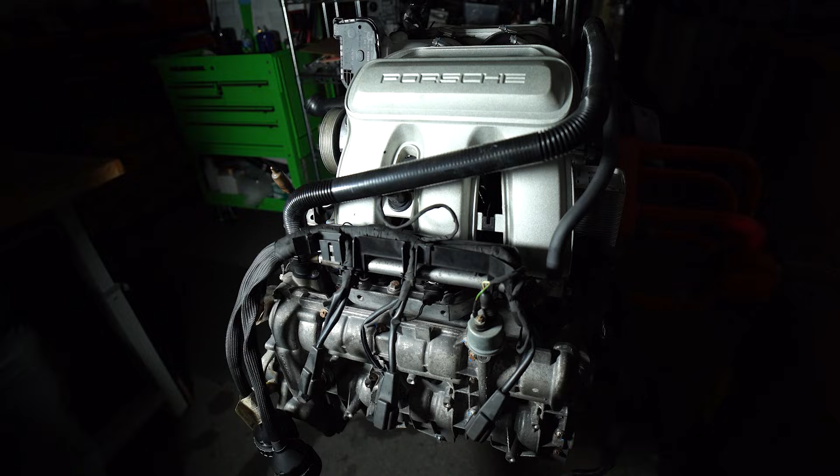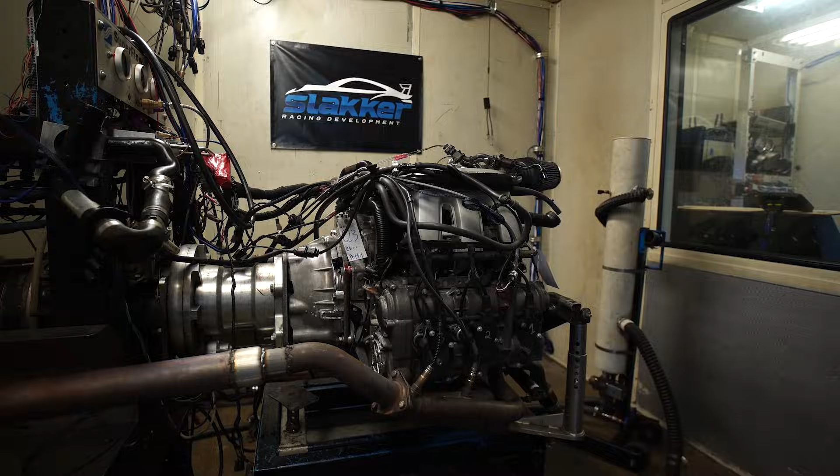What do we got today, Philip? Well, we have a little Slakker 4.1 powered by a Hartech closed-deck system with upgraded camshafts, stage 2 port job, our GT3 throttle body and plenum upgrade, and then our 8K valve spring package. 8K valve spring package, huh?

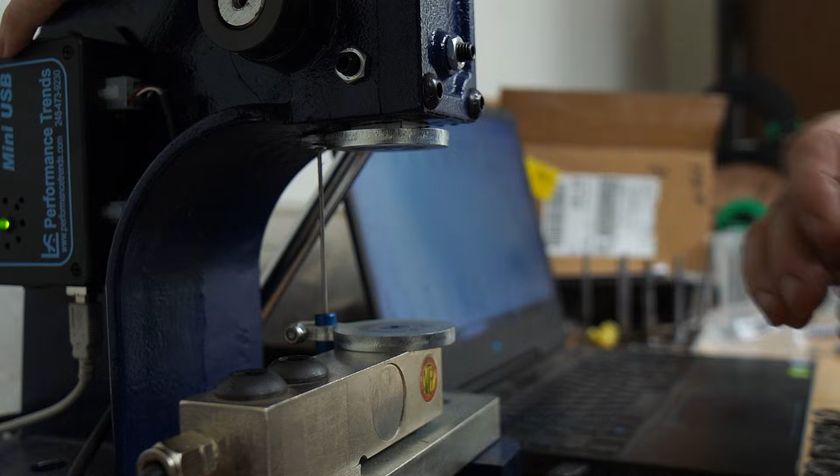Yes. What are the challenges of spinning up to above the factory rev limit of 7,300? Well, we have to control the valve train well enough to prevent float. This spring package is pretty well developed and versatile that we can set it up to run anywhere from 8,000 to 11,000, I believe. Isn't that right?

Yes, that is correct. So the reason we've picked 8,000 is the real challenges on this engine come in at 8,500. With the way the oil pump is driven, beyond that, we have some exposure to cavitation of the pump and getting more air in the oil system.

The other challenge that goes with that, the hydraulic lifters can become spongy and start kind of doing their own thing at the end of the day. It introduces them into the malfunctioning phase of the hydraulic setups. And this goes along with the vast majority of hydraulic lifters.

Right, and so we're kind of using that 8,500 limit on hydraulic lifters based on rule of thumb that's been passed down to us. We haven't actually tested that, but we've also seen some hydraulic lifters that have gone beyond 8,500 and they don't seem to come away from it too well, do they?

No. If you do find one that works, it typically means that the lifespan of the lifter is extremely shortened. You never know when you're actually going to have a failure, a catastrophic failure, and in some cases that could destroy the valve train components completely.

Typically when we see an engine that has been money shifted and spun to beyond 9,000, 9,500, 10,000 RPMs, having spider cracks on the lifters is one of the telltale signs that that engine has been overspun. So we picked 8,000, that gives us about 500 RPM of margin. Yes. We do have plans to maybe go a little further than that, but we're working on it, solve one challenge at a time.

It does. Let's see, we've got 136 oil, 150 on the coolant Fahrenheit, and so just need to get a little more heat into it and start working in that direction.

Yeah, I've left off. I didn't quite finish leaning out from 5 to 6. Okay. I have not finished, and I haven't even finished the timing. That's why I didn't lean it out. It's still at 87. Okay. So we still need to get our MBT set up from 5 to 6. Finish leaning it out after that.

Okay. Sounds good. Go ahead and bring this on up a little bit. Now then, we do have a little bit of a challenge with the dyno in that it's reading probably 7,600. Yep. Then we know we're going to be spinning about 8,000 here. Yes. As part of the testing, probably plan on revving up to actually about 8,200. And so pushing the envelope just a little bit, 8,200, 8,250.

That'll allow us to capture higher values on the dyno in the process. And I think that'll be okay for testing purposes. But the actual rev limiter will be set to 8,000 on the ECU when this engine goes out.

Now, the one thing that I have learned from our good buddy Wayne Schofield is that the inlet manifold flap does tend to like to come back on above about 7,200 or 7,300 RPM. So we get into like a different resonance range. No. That is awesome. Man, I wondered about that because, you know, resonance works off of pulses and how far it goes in and out, in and out.

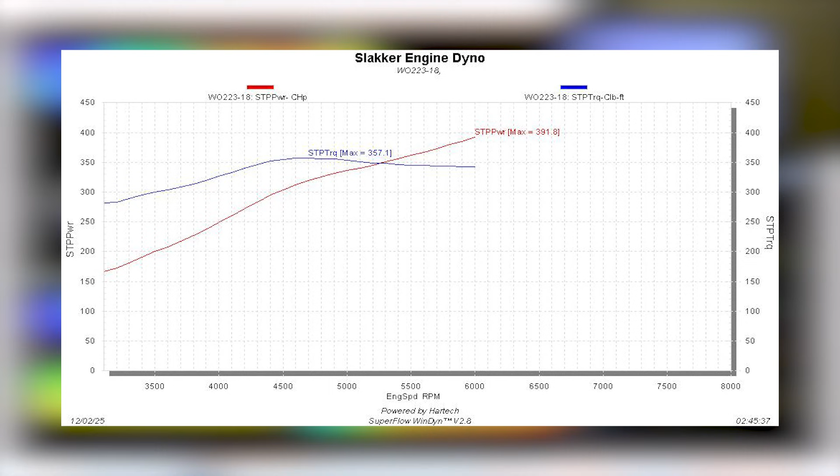It didn't get the last 100 RPM. That's why there's such a big difference in horsepower. It was like a 6 horsepower loss, but the graph was actually pretty well the same. Okay. Let's do a pull like that. So using the limits, let's use the fuel trims to set the offsets and see what happens. Okay. Ready? Yep.

Look at that. They're at least staying together. Yes. I think we're going to see a benefit to that later out here. See how much power we lost down low? That usually means that we're making... Run it one more time as a comparative, back to back.

Still had the earlier gain, didn't it? Yeah, on the original setup, yes. Okay. So I really think the offset we have programmed right now, we may actually see a benefit out over here from it. So we just need to keep our settings and then we can test that theory.

Well, let me bounce back real quick. Okay. Minus 1.5, because it's 4 versus 1.5. Minus 1.5. Yes. I'm just moving the bank 1 offset. All right, give her a go.

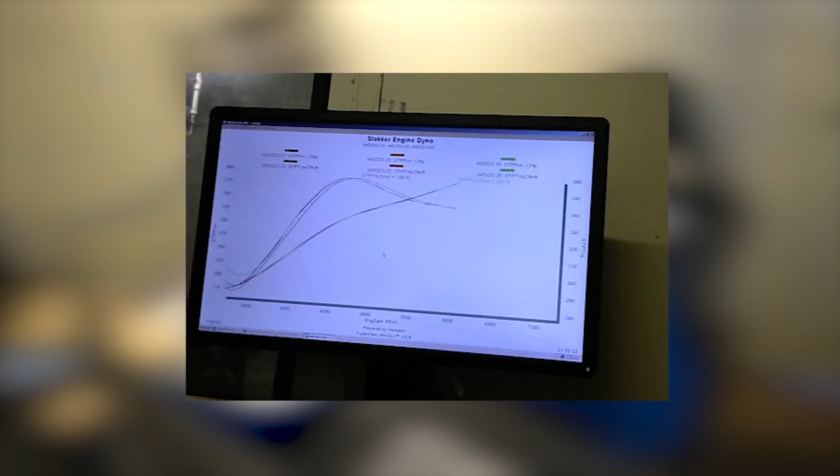Lost the top end. Okay. Bad. All right, let's see. Oh, it's because it didn't finish recording it all the way. All right, show me the comparative to the, what is it, 20? There it is. Okay, sure enough, we lose early if we do that.

Yep. Which is where the power band is of this. So I think that's where the VarioCams are supposed to make a difference. Yes. So, okay, that was an interesting little test. Let's take her up to 7,000, see how she looks and sounds. All right, here we go.

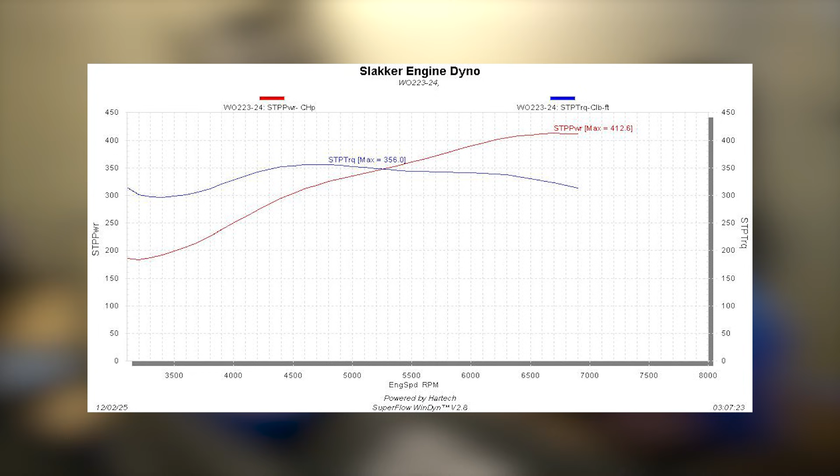What injectors do we have on this? They're 1/16, I believe. 1/16. Oh, the Bosch. We may have to upgrade the injectors. Yeah, we're gonna have to, with the 98.3% fuel injector duty. We haven't dialed in the tune, so sitting at 412 right now is probably a pretty good spot for us.

Yeah, I think you looked a little concerned, I'm not gonna lie. A little bit nervous when we do this, just like you are. Right? I just try to keep my composure. Not me, we tend to flinch. Flinch and clinch.

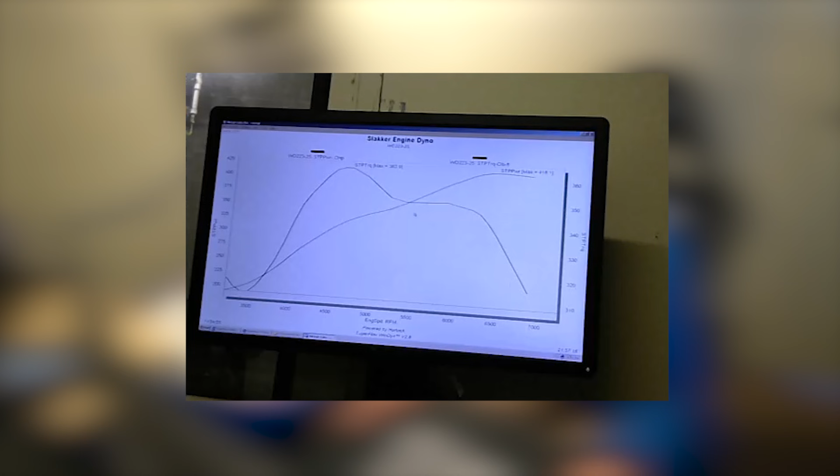Let's do another one with the 400 limit, just so we've kind of got our baseline. All sounded pretty good and smooth. 364 on the torque. Whoa, we've never hit 364 on the torque. We just haven't tried hard enough. What gets me on these engines is this dive right here. Uh-huh, that dive right there. Yep. Let's set it for 7,500. Okay.

It sounded good. Dude, I wasn't nervous a bit. Oh, we're gonna have to change the scale. Hang on. I always like it when we have to do that. Okay, looks like we peaked out at about 7720. Yep. No problems either. Okay, and that was at 7,500, right? So 7,900. Okay. 7,900.

You gotta let that knee bounce too, though. All right, here we go. I had to take a breath for a second. All right, we got this.

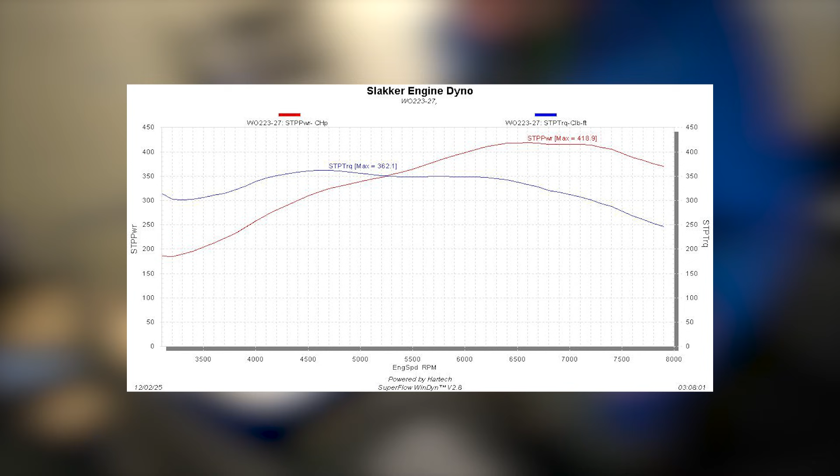I saw a puff of smoke. Out of where? I don't know. Okay. That's why I was about to say you flinched. We still hit our 7,900, but I saw a puff of smoke, so that's why I flinched. All right, let me go check it out. Best I can tell, there's just a small little flash of something off the front. Off the front? To me, from my angle, it looked like off the side.

I was looking over the oil pressure while we were doing this, and I do have a concern. Right, we're starting to see the cavitation already. I have a fix for that, and I've already researched it. Where are we seeing the cavitation? It's not really cavitating. It's just not keeping up with our RPM. We're not getting any more pressure out of it. We're starting to drop pressure right at about 7,000 RPM, which I'm guessing is where the oil pump is essentially tuned for. Yes.

So we're at 78.1 psi at 7,000 RPM. From around 3,500, we're at 72. So we gain 6 psi throughout the rev range. Yes. And then we start reversing, and from 7,000 to 7,900, we lose just over 1 psi, 1.3 psi. So we're not losing much yet, but we are starting to see it.

Typically the gears on an oil pump will put out more volume than the pump will itself, design-wise. What you have to do is modify the entry to the pump and the exit of the pump to get the full flow rating that the gears were designed for. I've already looked into it. But if the gears are spinning faster than the entry and the exit, is that when we see that slight decrease? That's a good question. I don't know yet.

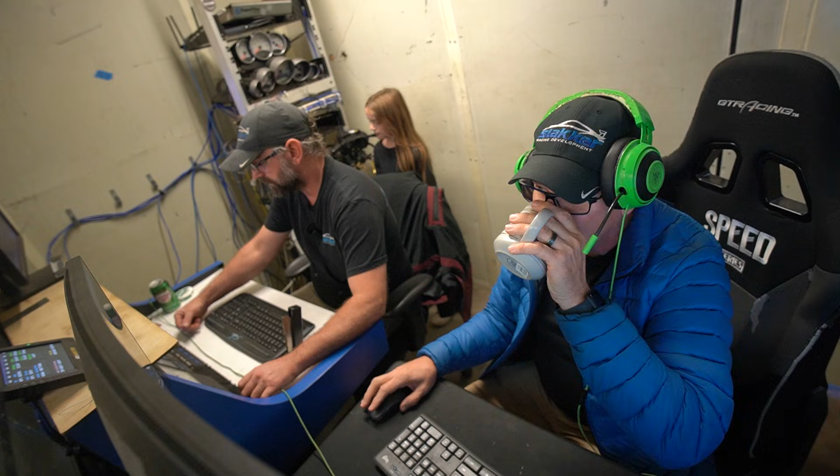Okay, we just did our first 8,200 pull. And now we're wanting to go up a little higher? Or we want to tune in what we got? Let's try the flap. Oh, yes. Okay, we're gonna kick it back in at 7,200. Okay. See what that does. All right. There we go.

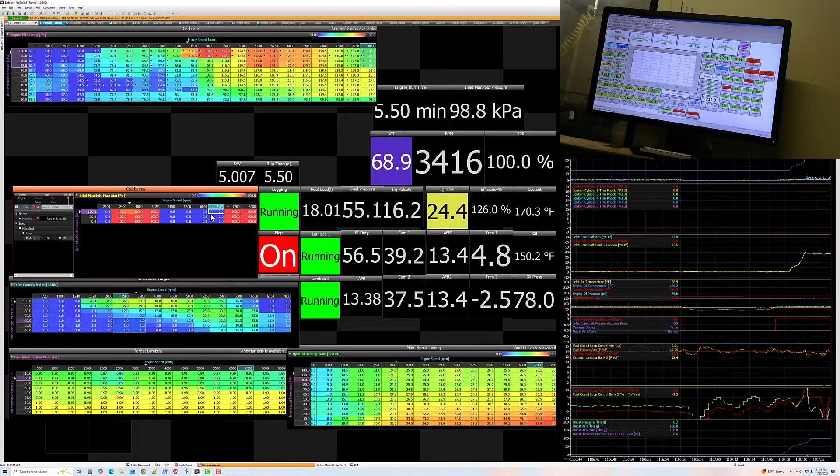Whoa, that is way up there. How high did it rev? It did extend it out. Holy shit. Wow. Wow. Yes, it did. Check that out. We just got to find the sweet spot. Dang. All right, pull up the comparative. So closing the inlet flap. Dude, that's monster. Fix the drop. Look, we gained 20 foot-pounds of torque. At 7,900. That is amazing. Dude, I gotta show Clayton this. That is so cool.

Clayton, come here. So he caught wind that the resonance flap could be reopened at higher RPM to extend the range. Boom. Yes, it was absolutely correct. That is freaking awesome. We just have to find the sweet spot.

Everything looks pretty sound. We did have a little bit of that knock blip right there. Yeah, it was just isolated. Yeah. Probably a little too aggressive of a trim for what it was. We were at 26.5 degrees. I don't think we actually have an issue. That may be a one-time occurrence. Yeah, I think it's phantom, but that's fine. Dude, cool fucking discovery. Let's go. Alright. Add a little bit of timing back in.

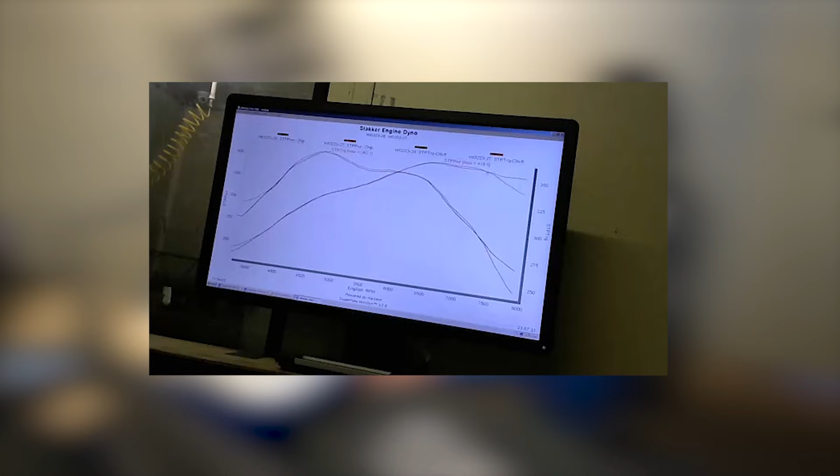I think, so looking at that, where did the horsepower or the torque shift at? Pull back up the comparative graph. Okay, hang on. You opened it at 72, right? Yeah. We didn't see any effects until 73 from it, really. Let me pull up the comparative. Actually, we saw the 72 effects on the dyno. Double click on that and see if it'll give you a number. 7,300. Okay. Yeah, so 100 RPM off. So I don't think we want to wait any longer, do we? No. We may try backing it up a hair, and seeing if we get a benefit from it or if it just destroys it. You know how that goes.

Now here's where it gets really interesting. Do we gain any value bringing the cams back in? All right, so I'm gonna back up the flap 100. Oh wait, hold on. I was already changing the timing. Let me back off on that. Slow down, Speed Racer. It would be nice if we could get it to react right here at 7,100, because that's kind of where it starts to fall over. Yep. If we can just get it to flatline out. Let's see. So we'll back it from 72 to 71 and see what she does comparatively. Okay.

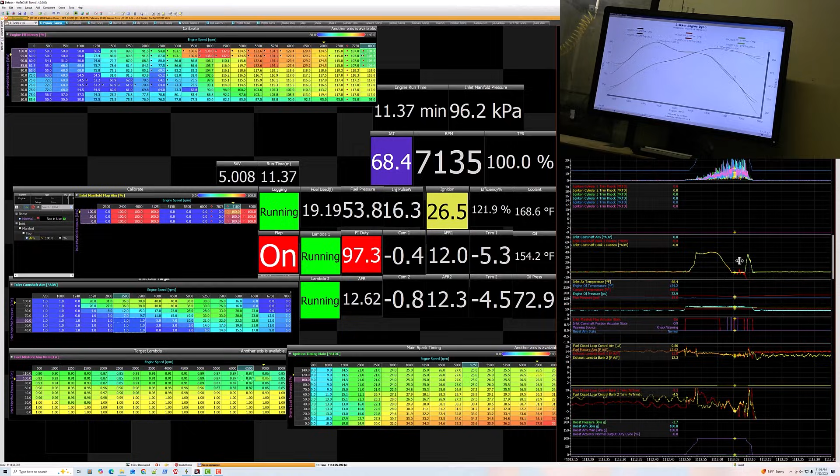She sounds smooth. We're not having any valve train issues. Well, that looks pretty good. We got something going on here. Our trims are just nuts. We had something happen there. I'm gonna turn it off for now. It happened during the pull. Something with bank one. Oh, look. We lost bank one. Yep. We didn't lose bank two. All right. We know what happened and why.

So exciting. So much progress. It really was. Let's take the positive notes and roll with it. Okay. And we positively know what the fix is. Yep. So let's just get on it. Okay. All right. Good work, sir.